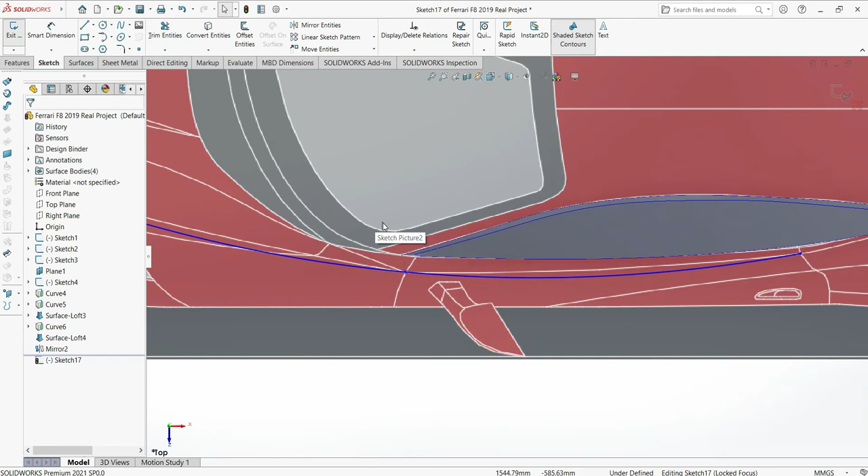Let's now start modeling our Ferrari F8 2019. What I'll do is go to the top plane, sketch, and from here I'll start making this long line from this point up to here. Now I need to make some changes to ensure this line goes straight to this line here.

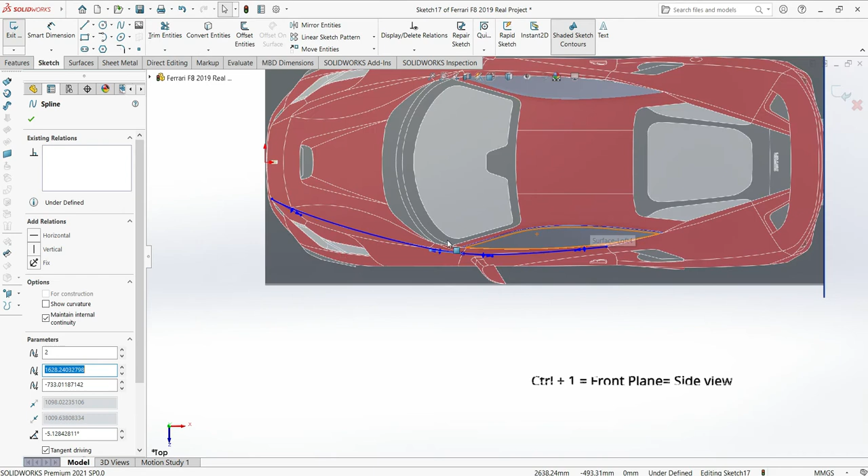So the line is fit, as you can see here. Now what I'm gonna do is come here and rebuild. So we have the line from the top side.

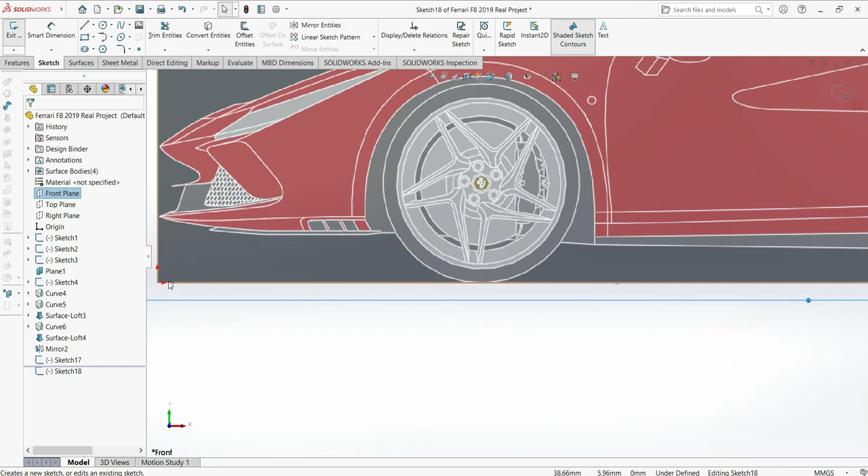Now I will do the same line but on the front side. Come here to the front and sketch, and I'll do the same thing. Make sure we have this line here, starting from this point and going up along the way to this point here.

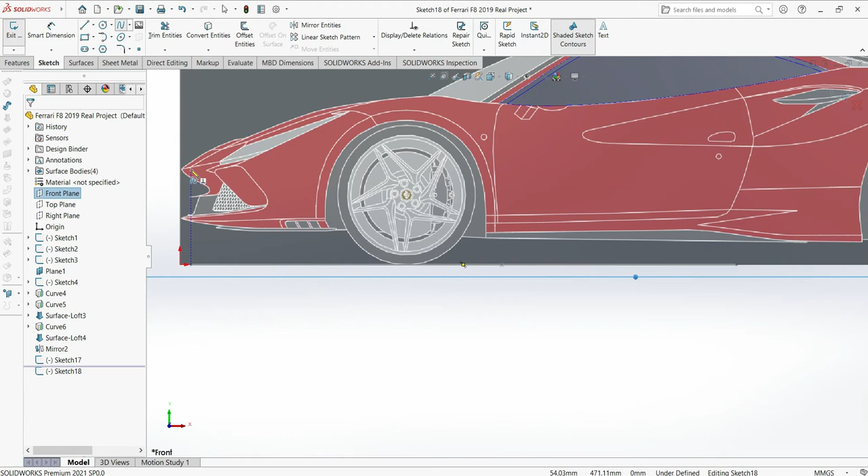So you can come here and use spline as well. Put your cursor here, don't click, and then move up. Make sure you do the exact same point. So we're talking about the line here, select that point, and then also move up.

So we'll click here, then also here, and then move away to that point.

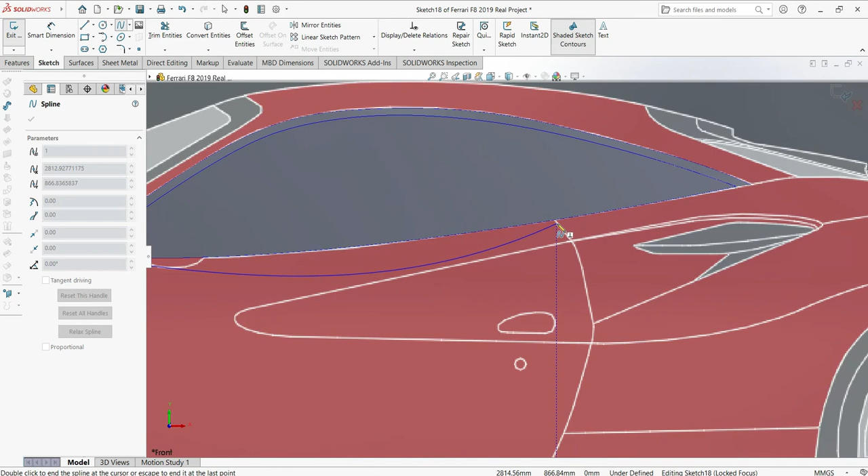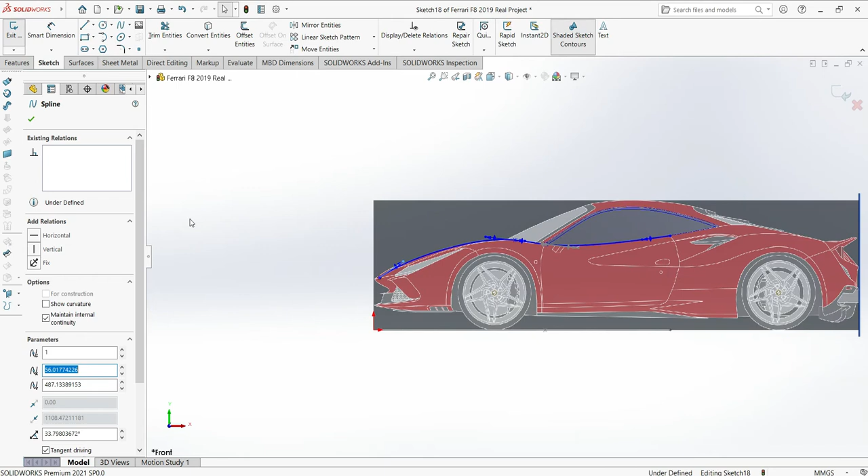Same thing, we need to make some changes here. Make sure it's all set up according to the line, and then we'll come here. So the line is set up, and then just click OK.

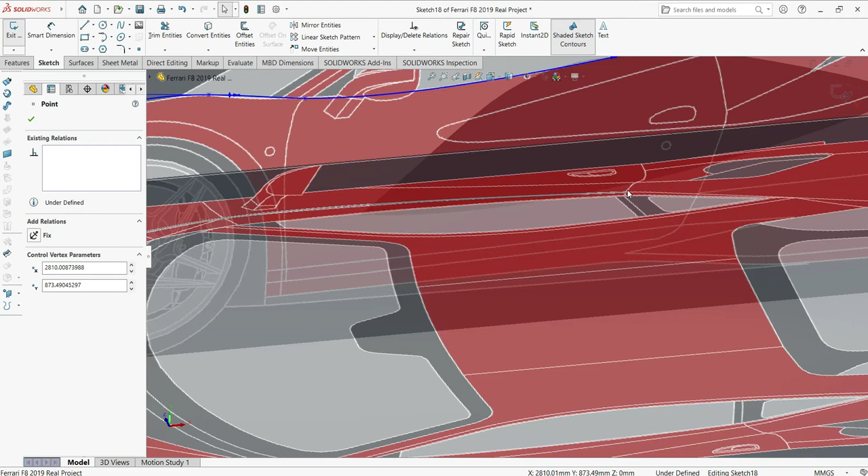Before that, select this point, go back to the other line we already made on top, looking for that line. So we have the line from the top, select a point, then set to vertical. Do the same thing on the other side, selecting this point and also this point here, vertical.

So they are vertical both from the top and also from the front side. Then come here and rebuild. So you have two lines, which is good. Next step: select both lines, go to features, curves, and then project curve. So this part is done.

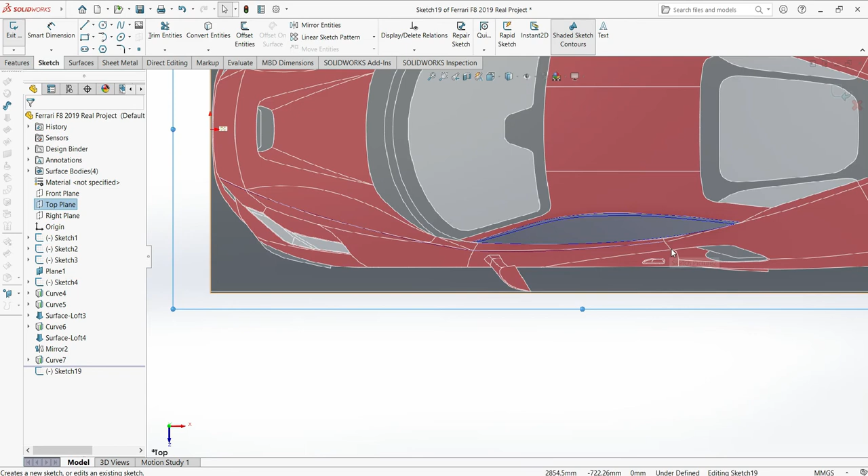Now we're gonna make a second line, and I'll start from the top again. Rebuild, and here I'll choose this line that's coming from here and goes up to here. Let's make this line now. I'll go to spline as well.

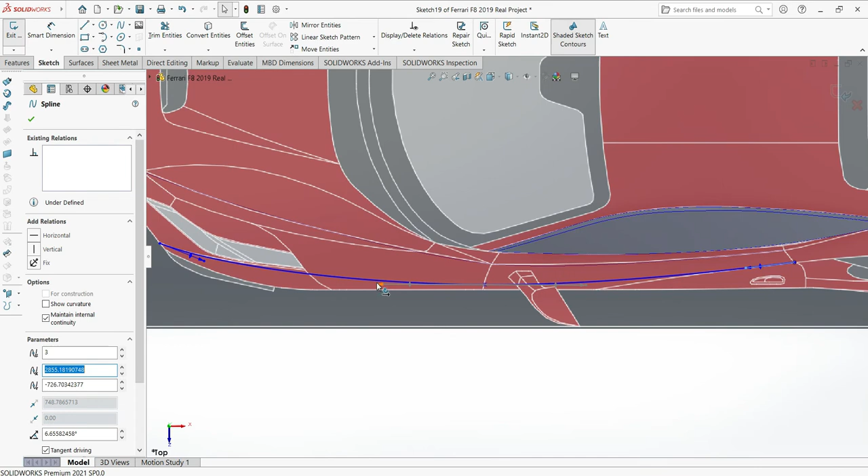We need to make some changes here and make sure it follows the line like that. So it is also done, and rebuild from the top. Do the same thing from the front plane.

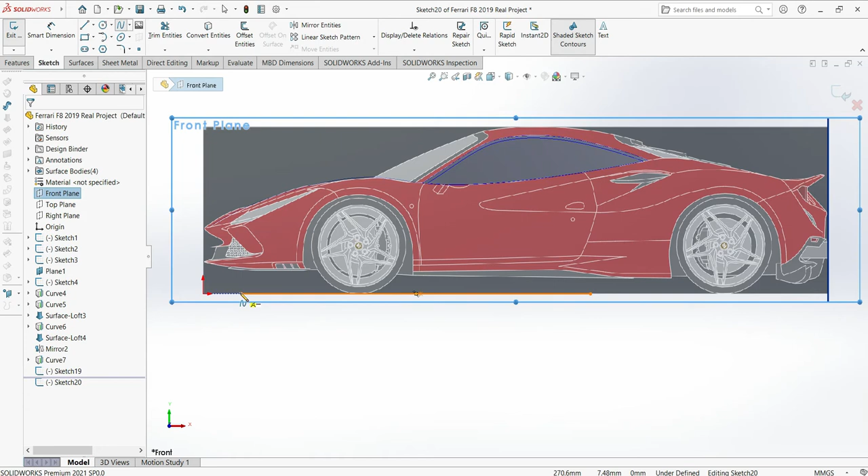Come here to the front, sketch, and we'll do the same thing. So this is the line, and we'll follow the same line. Come here, put your cursor to make sure you go straight, so we'll go to this point.

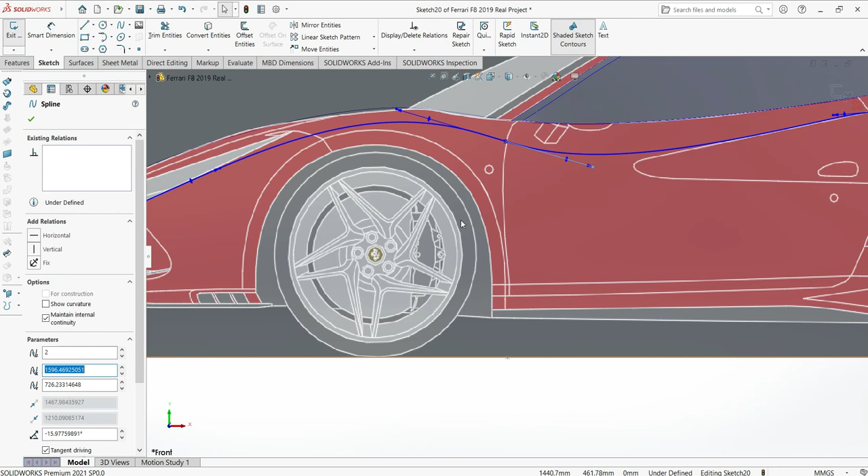Now let's do something. We have pretty much the line. So that's the lines, and something very important here is you need to select these points and also go to the top, go to the top lines. Okay, so that's the one from the top.

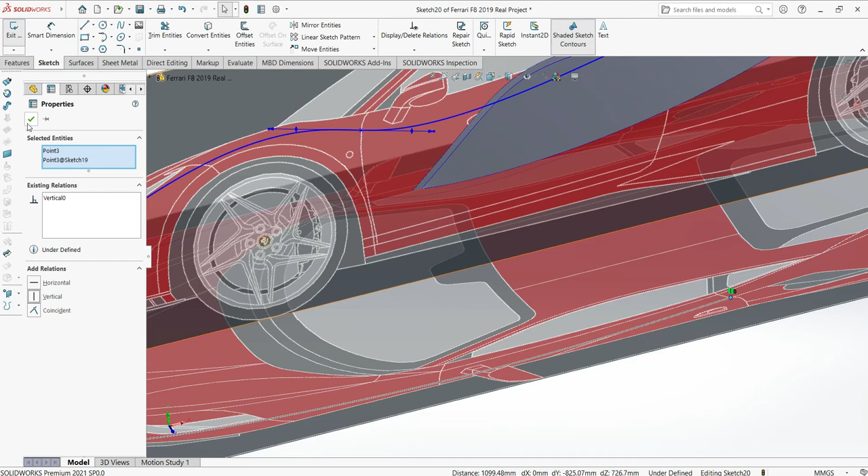Select also here, and then set it to vertical. Do the same thing on the other side. Select this point, and also select the same point from the top one. To make the selection, hold Control, click one line, Control again, then click the next line, and then OK. So we select this one, Control, this one, vertical relation, then OK.

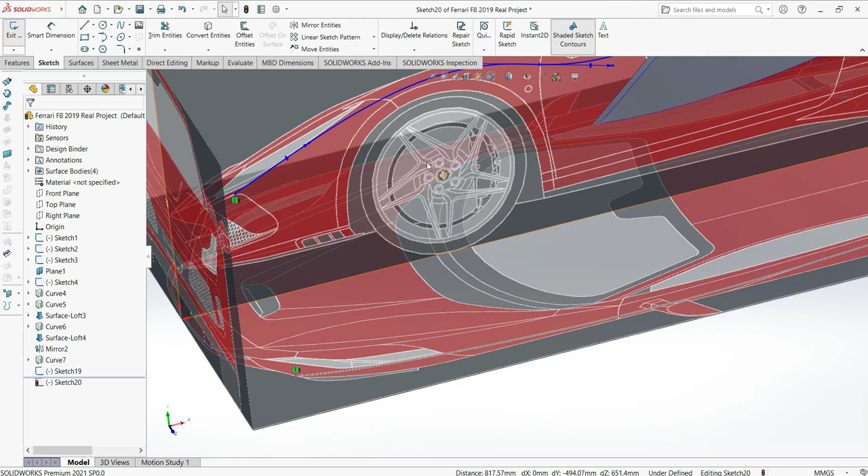Then rebuild. So we have both lines from the top and also here. Now what we'll do is select these two, go to project curves, and then OK. So it is done.

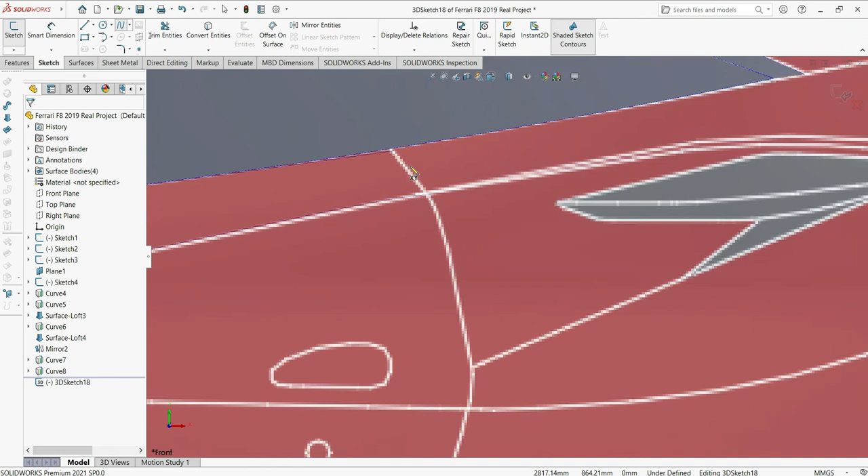These steps are done. What we'll do now is join these two lines. Go to sketch, 3D sketch, select the splines, and we need to connect the two lines, which is this one here, and also connect to this one.

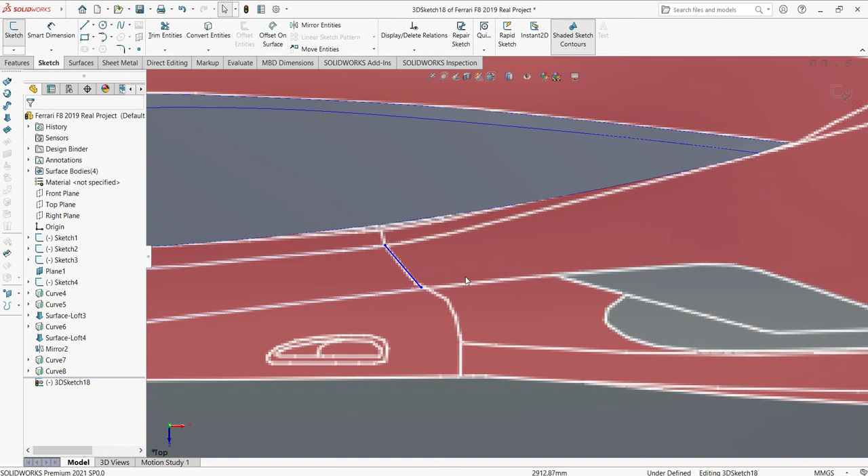Done. So we need to look from all sides, make sure that when you use 3D lines or entities, you always need to check from all sides. Just make sure it's all lines, goes to the right, do the same thing here.

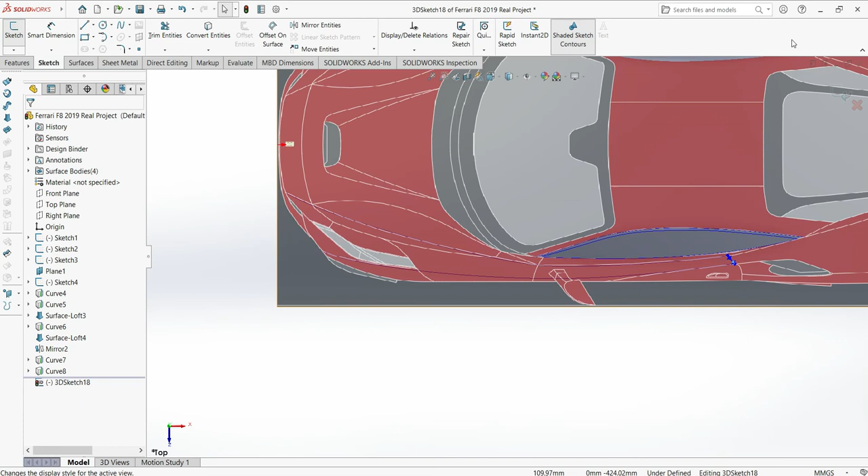So do the same thing on the other side, what is here as well. Come here, rebuild, 3D sketch again, spline, now select and join these two lines from the top, click there, and also click here, then check in all positions.

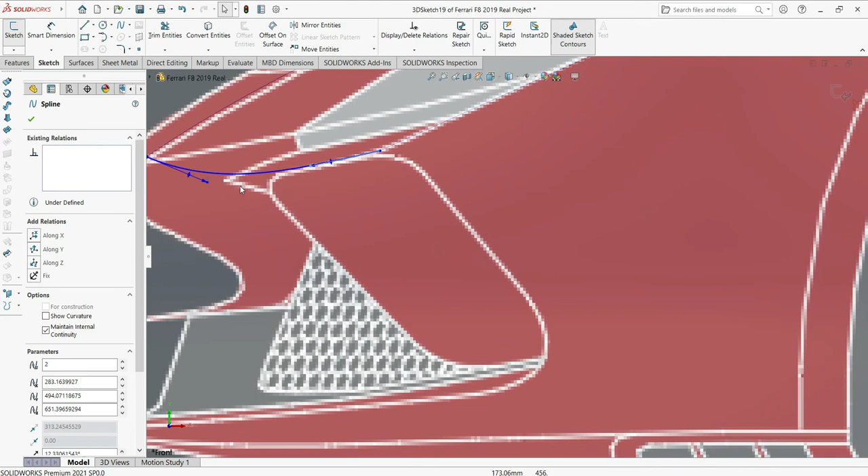Rebuild. We have here these two. The next step will be to use the loft. Come to the loft feature, and we'll start from this curve, also this one here, and then use the guide.

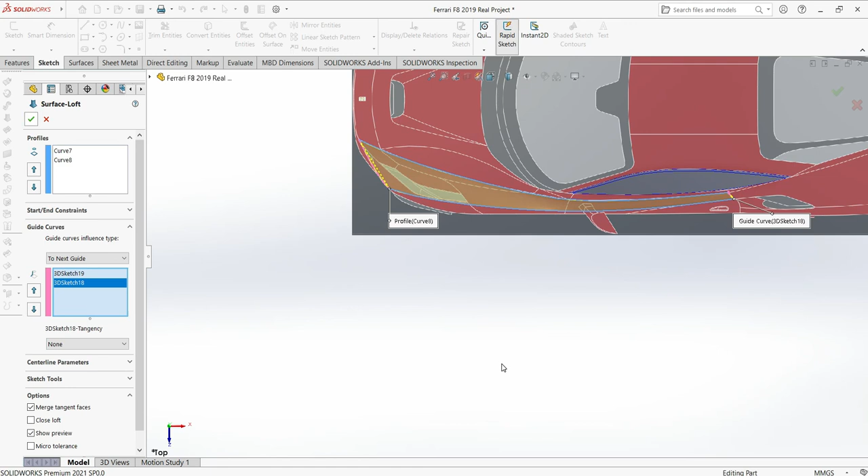This one, and also this one. Okay, done. So we have these first parts.

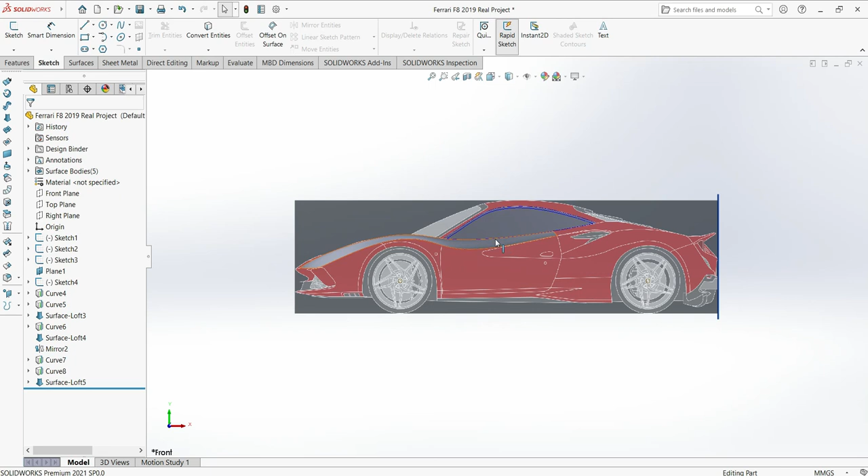It is here, so you can see. From the car like that, and you can see from all sides it's straight to the car shape. So that's the one we want to achieve, which is good. You can see it from a different side.